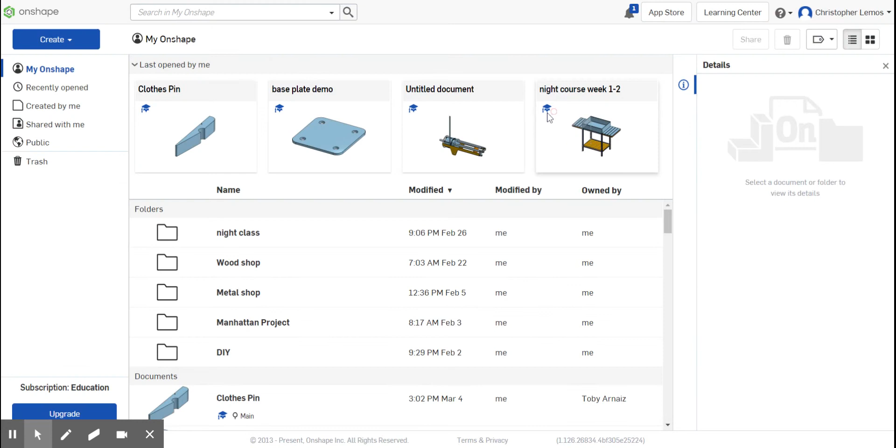My computer is a little bit slow tonight.

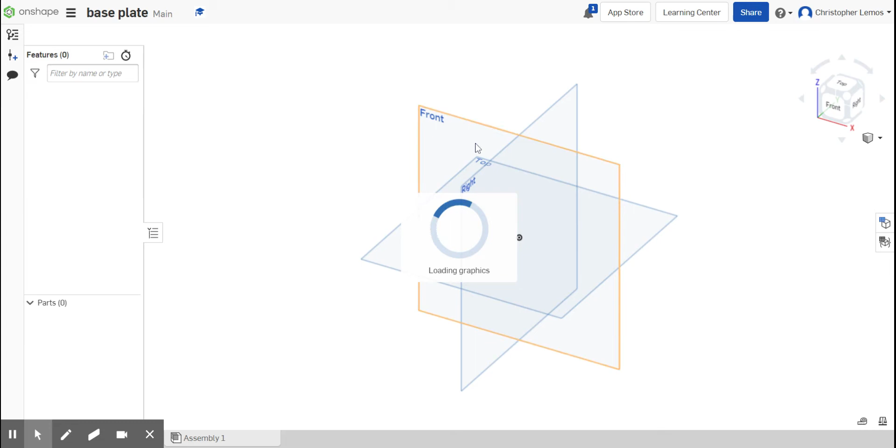Okay, so when your work area loads, you'll notice you have these three different planes: front, top, and right. Think of these as different pieces of paper that you can draw on in a sketchbook, depending on which direction you want to draw from.

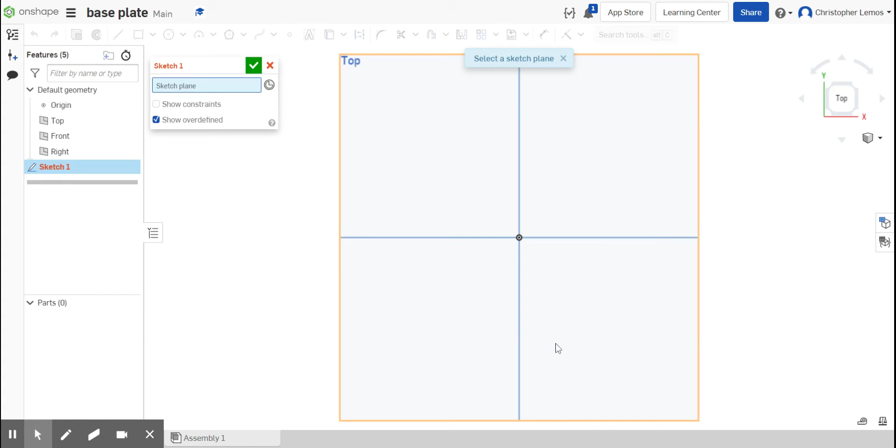So today we're going to use the top. We're going to click the top on this navigation cube, and then click Sketch, which opens a sketch dialog asking you to select a plane. You select the top plane by clicking anywhere in the square showing the top plane. We click on that, and now our sketch turns from red to black, and it says top plane.

So the next thing I'm going to do is hit the P key, which gets rid of some of these extra plane lines that just clutter things up.

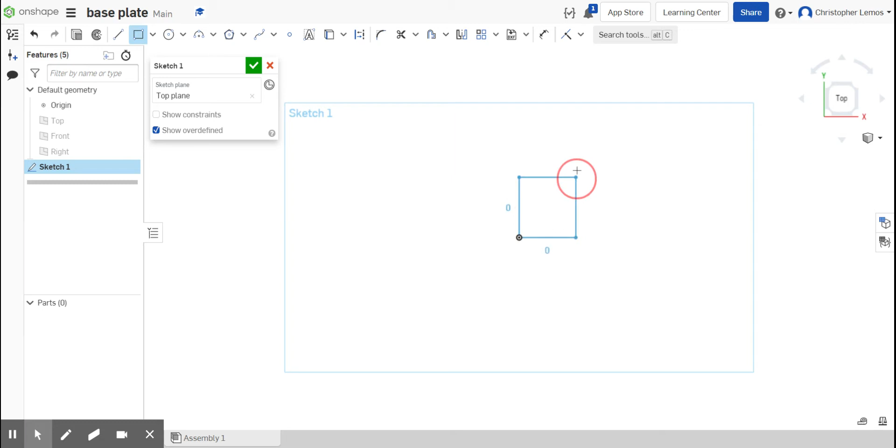So today we're going to draw this using a corner constrained rectangle. You come up here and click corner rectangle, then go to your origin point, which is an XY of 0, and click and drag up. Doesn't matter how big you drag, you just need a square to start with.

Then you're going to select the dimension tool, which allows you to set the dimensions for the various lines in your drawing. We're going to start by clicking on either the left or right line, drag it out, and then click again. You're not holding the mouse button while clicking, it's just click, drag out, click again.

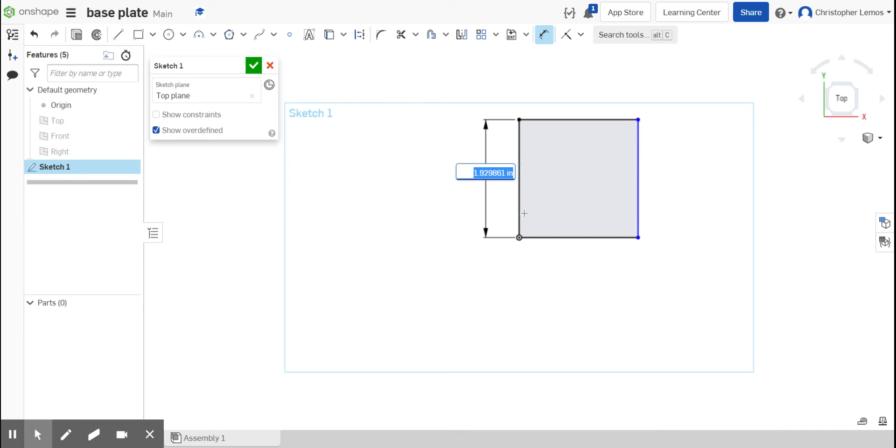Then you can put in your dimensions, so we're going to go 12 inches, hit enter, and it's going to get quite big now. So we're going to click on our top again on the navigation cube, which will center it.

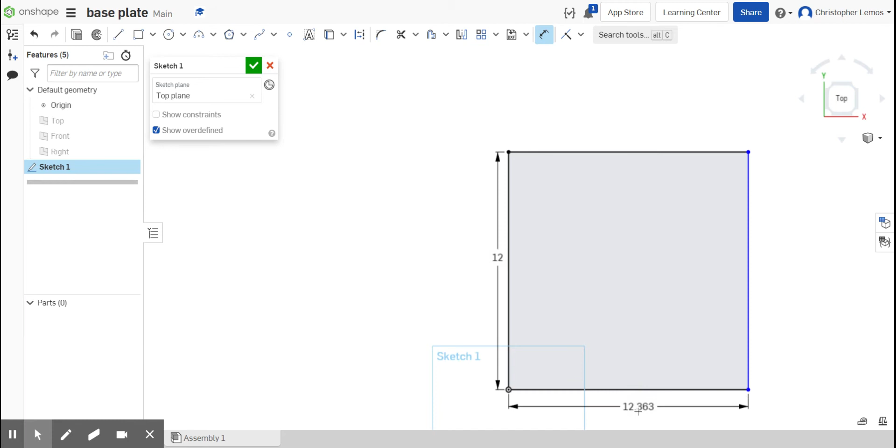I'm actually going to zoom out a little bit more. Next, with dimension still selected, I'm going to click on this bottom line and drag down, click again, and then put in 12 inches, hit enter. Okay, so now I have our square, which is 12 by 12.

Then I'm going to come up here and select center point circle. Click on that, come over here somewhere kind of towards the corner, and I'm just going to click and drag out a circle. And then I'm going to do another circle over here.

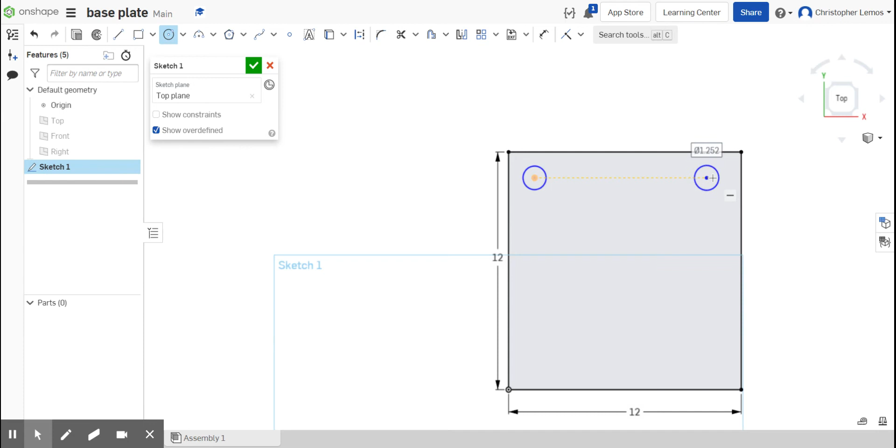Notice I hovered over that circle until a box showed up, and then dragged across, showing this yellow dotted line. That constrained those circles so that they are on the same plane as each other, horizontally constrained to each other.

So I'm doing the same thing. I'm hovering over the circle I just drew so it shows a yellow box, and then dragging down so you see that dotted line again, and I'm going to drag myself another circle.

Now I'm going to wake up the constraint on this one, and also wake up the constraint on this one, and drag down until I have the yellow dotted line coming from both my top original circle and my new circle, and I'm going to click and drag another one.

Now, it doesn't matter how big you're dragging these circles because we're going to dimension them now. So I'm going to select my dimension tool again, click on the circle, drag out, click again, and make this circle 1.25 inches.

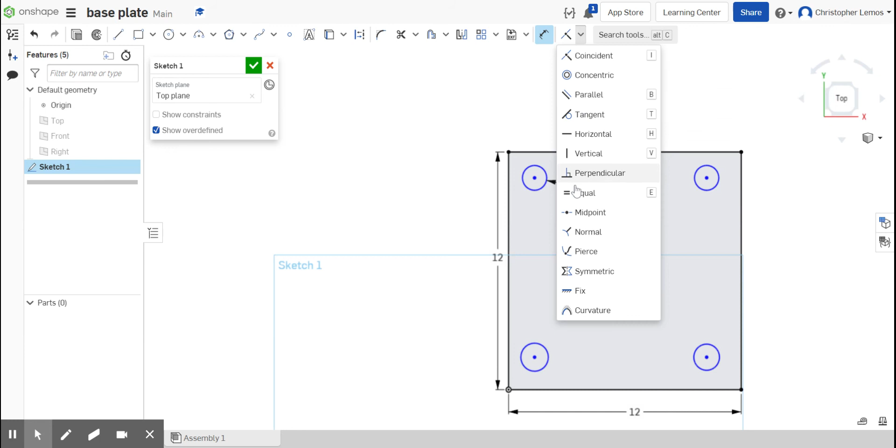I don't want to have to redimension each of these circles if I need to change their size. So I'm going to come up to my constraint menu, click the down arrow, and select equal, or just hit the E key. I'll click on my first circle, then my second circle, and it resizes so they're the same. Now this circle and that one, and once again it resizes. Then I hit escape to get out of the tool.

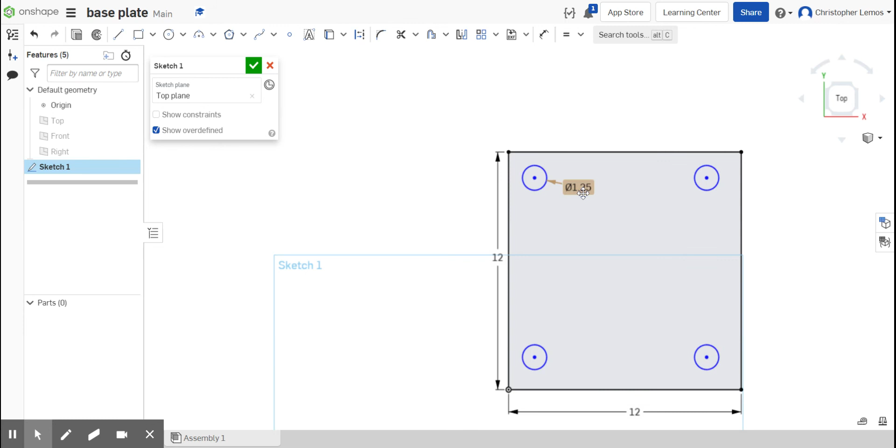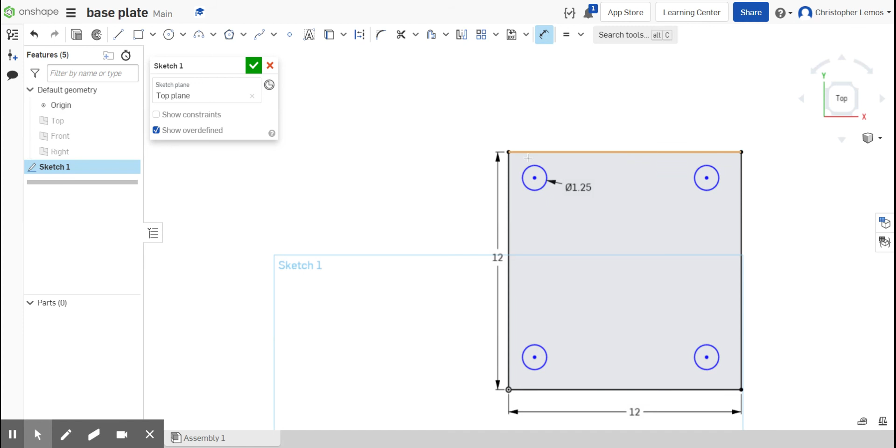Now we need to tell the computer where we need those circles to be. So we're grabbing our dimension tool again, and I'll click the center of my first circle, then click this line and drag out, making this 2 inches. 2, enter. Now it's 2 inches away from that side. I'll click the center of this one and the top line, come up, click, and put 2 inches, enter.

Over here, dimension, dimension, 2, enter, dimension, dimension, 2, enter.

Some of them, because they're constrained to each other, didn't need new dimensions, but you need to put in enough so that all of the circles turn black. As long as any line or entity is black in OnShape, that means the software knows where it's supposed to be and it is constrained to something.

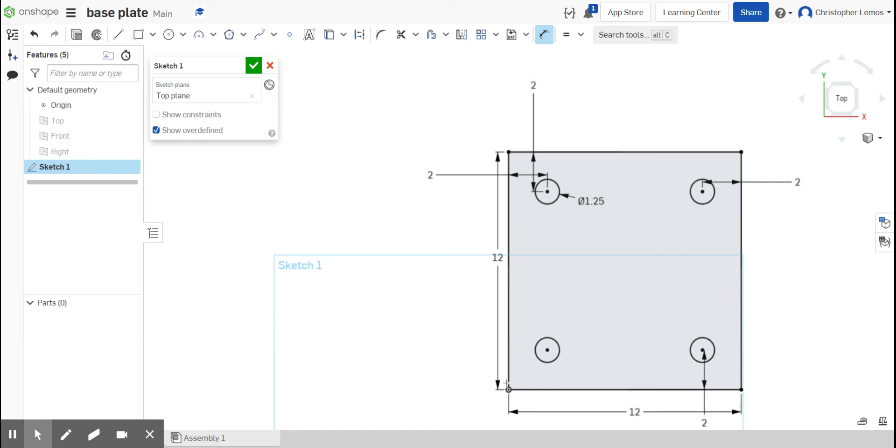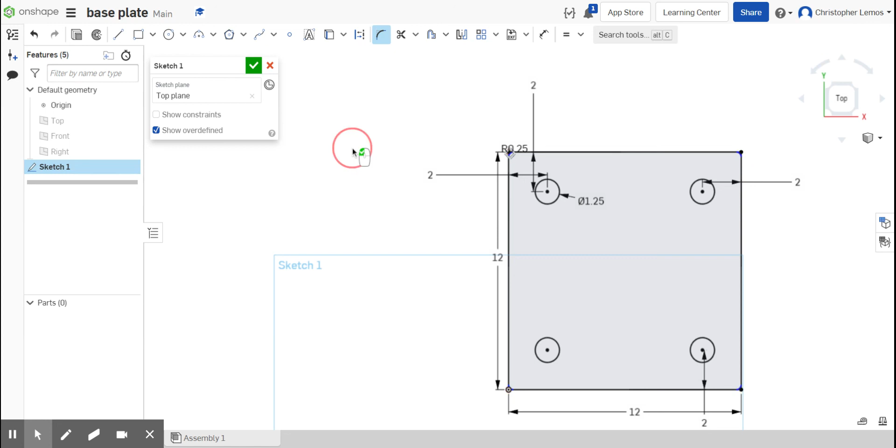The last thing we're going to do is fillet the corners, or put a radius on them so they're curved. We come up and select the sketch fillet tool, click, and then click on each of the corners. Now that I've selected all the corners, I click anywhere in the white outside of the drawing again, and it opens a spot to put in what you want your radius to be. I'll put in 1 inch and enter, and now each of the corners is nice and curved.

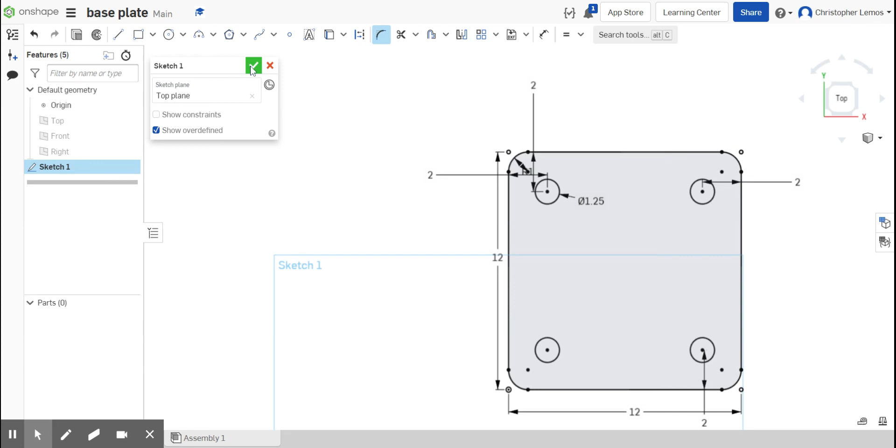So now we have everything exactly how we want it, matching our blueprint. We come up and click the green check, which basically means we are done and it saves the sketch. Now everything turns gray and our dimensions disappear.

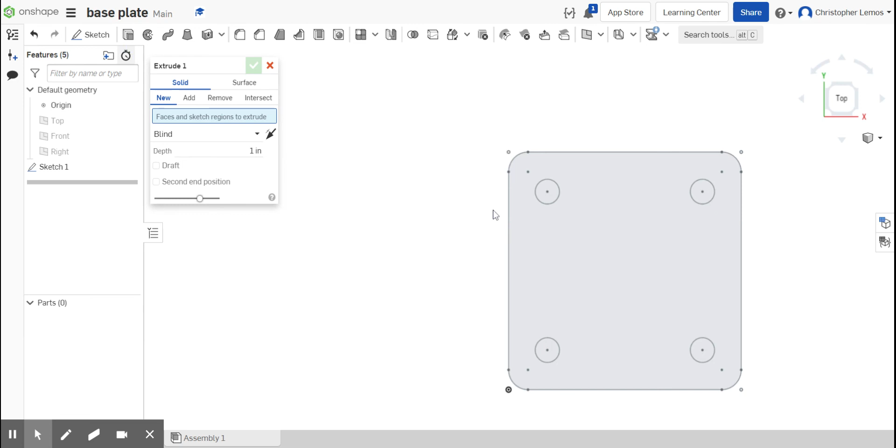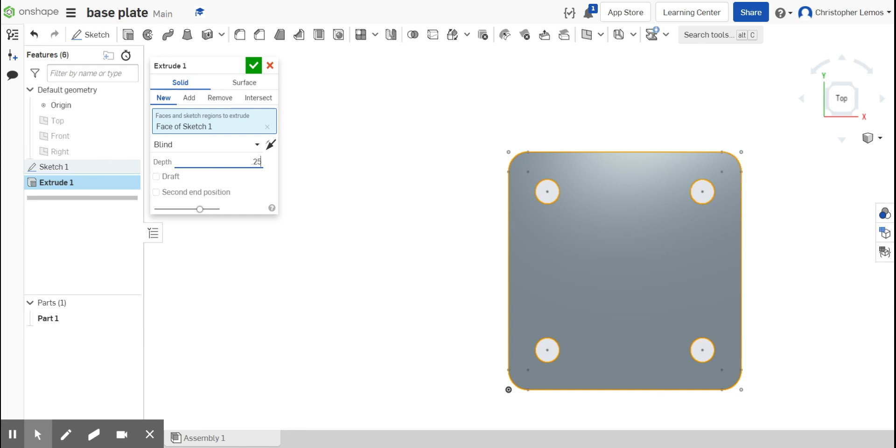But we want to extrude this because we're going to be making it out of a piece of metal. We come up and select our extrude tool, click, then select the surface to extrude, clicking the middle of our drawing but not any of the circles, since we don't want to extrude or thicken them. 1 inch is a bit thick—we'd realistically make this out of maybe 1/4 inch, so we put 0.25. You can scroll around and see if you like how it looks. I think that looks about right, so we hit the green check again.

And now you have your base plate drawn and extruded.